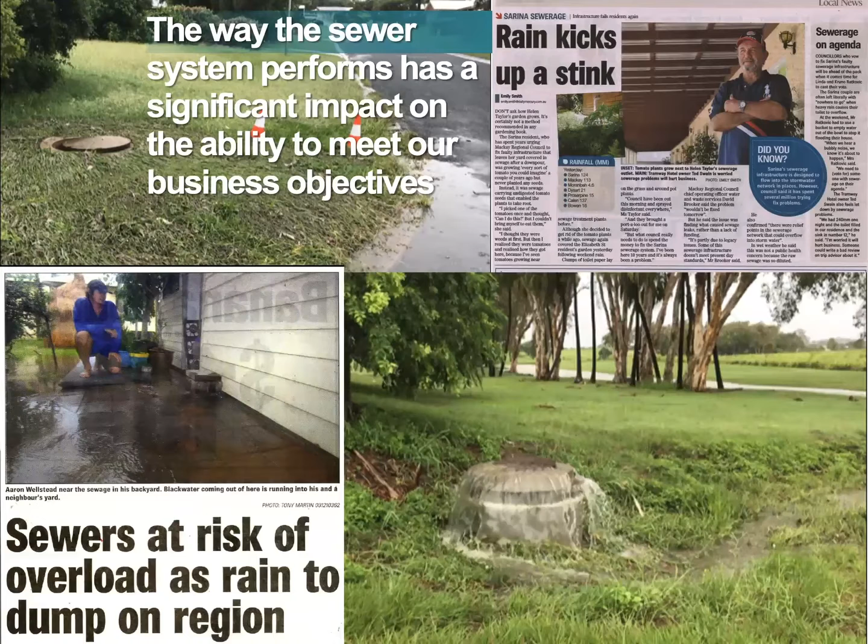But the story reflected to me by the council was that a lot of money goes into maintenance of the sewer network, both in terms of preventing overflows, relining the network, looking for illegal plumbing connections, looking for leaky manholes, to try to track down or prevent wet weather overflow events. Without any data, it can be very difficult to work out what maintenance activities are making a difference, if any, to the impact of sewer overflows. And obviously, these events have quite negative impacts on the members of the public.

So the council came to us with a request to look at building a sewer monitoring system that looked at parts of the sewer network that are not traditionally monitored, or at least not traditionally monitored in a fixed fashion.

So by using the same communications network that we're using for the smart meters, we've worked with the council to install sewer sensors or level sensors in the sewer, and then using that same low power communications network to be able to pull the data out of the field, concentrate it on a receiver, bring it back to the cloud, and then process and deliver that data through to application software. The objective of using a low power network is to decrease the overall cost of a fixed monitoring network.

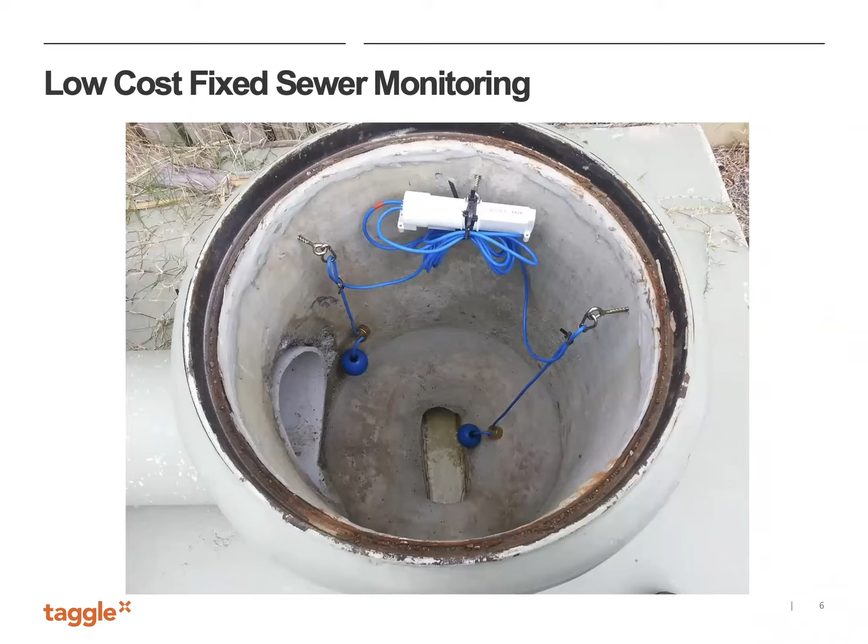So as a first generation device, these work reasonably well, although we did discover that sewer networks are quite turbulent environments. Let me describe how this is supposed to work, and then I'll talk a little bit about the limitations. So those float switches operate by, as the fluid level in the manhole rises, the float switch lifts and triggers a switch, either a mercury switch or a little ball bearing oriented switch, that tells you that the float has now inverted and that there's now water at that level.

And so in the normal operation on the left-hand side here, we would see that a float switch should be off if the pipe isn't full. By strategically positioning the first float switch, as the sewer pipe reaches capacity and starts to fill the well in the manhole, this first switch will actually activate and send a message to the transmitter that then sends a message back to the cloud software.

By installing a second float switch and setting its threshold level at the overflow, this second float will tell us that there is an alarm state. We're now discharging sewage into the environment, potentially impacting the public, which is ideally something we really want to prevent. The first switch gives us some pre-warning that the second event may be occurring. Now, it doesn't have the resolution of other sorts of level sensing, which I'll show you a little bit later, but it does have that advantage of simplicity.

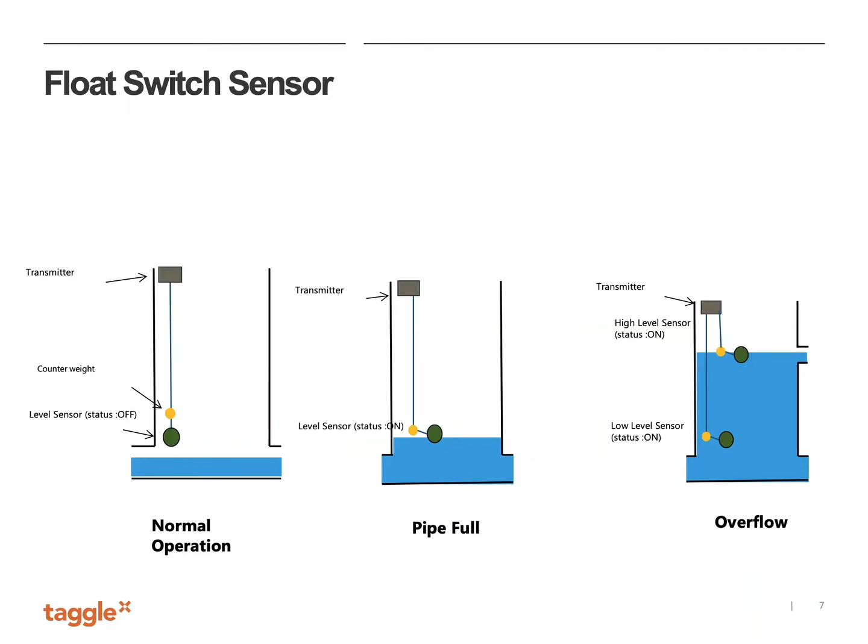Taggle worked on a new generation of transmitter based on that feedback, so that there's some business logic in the transmitter to be able to distinguish between a rise or a fall in the float switch and just the bouncing around of the ball for turbulence. Overall, this is a pretty good mechanism for monitoring sewer levels. But where it becomes a little bit more interesting is when you get to correlate the behavior of the sewer levels with what's going on elsewhere.

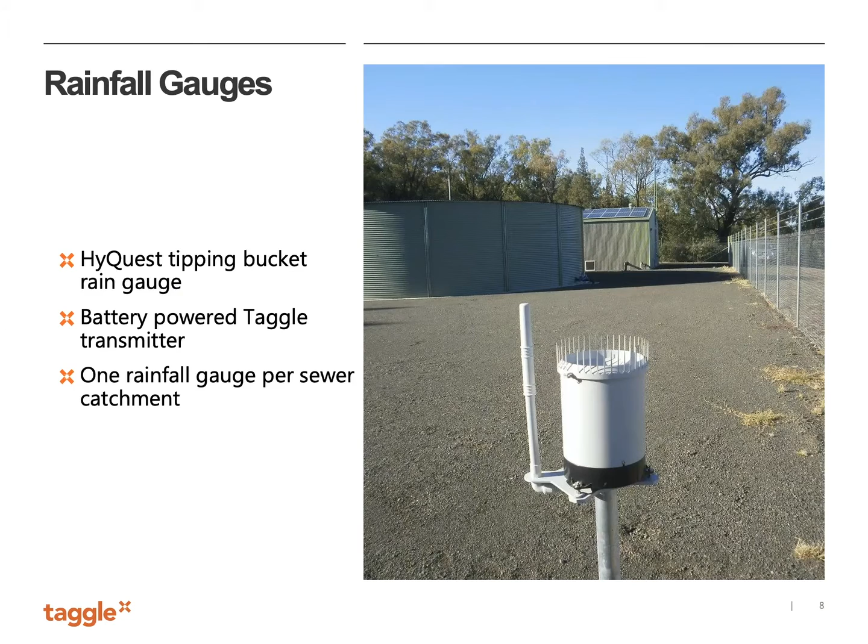So this is an example of a relatively low-cost rainfall gauge. It's a very high-quality gauge. This is in the same family as the one that the Bureau of Meteorology uses. And attached to the left-hand side of that is a Taggle transmitter. That unit stands alone. It doesn't require a communications cabinet, doesn't require any additional power supply. That's really just a pole concreted into the ground with a little bit of effort to make sure that the rainfall gauge is leveled. And if we put one of these in each catchment area aligning with the catchments of the sewer, we can now start to correlate rainfall in a catchment, which is indicated in this chart in blue, with the sewer level occurring in that catchment.

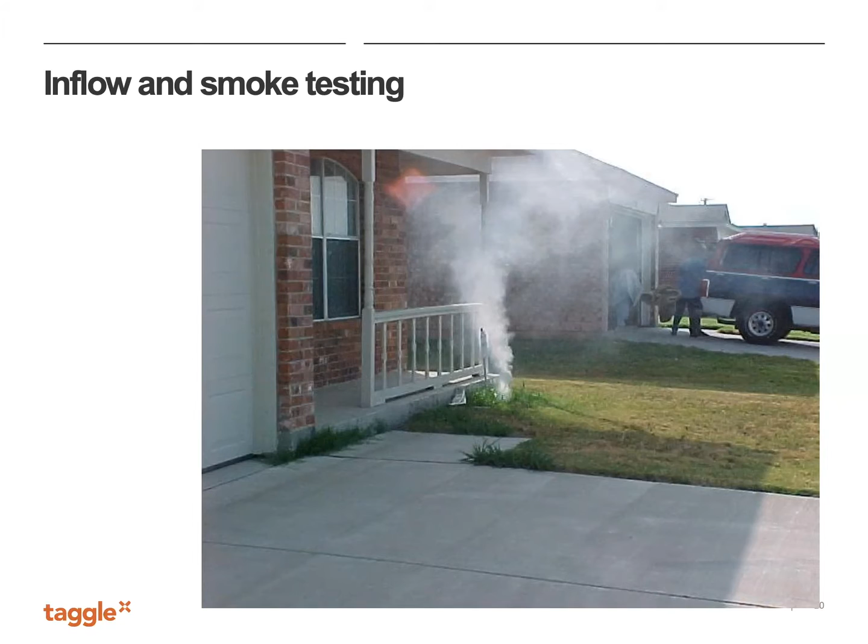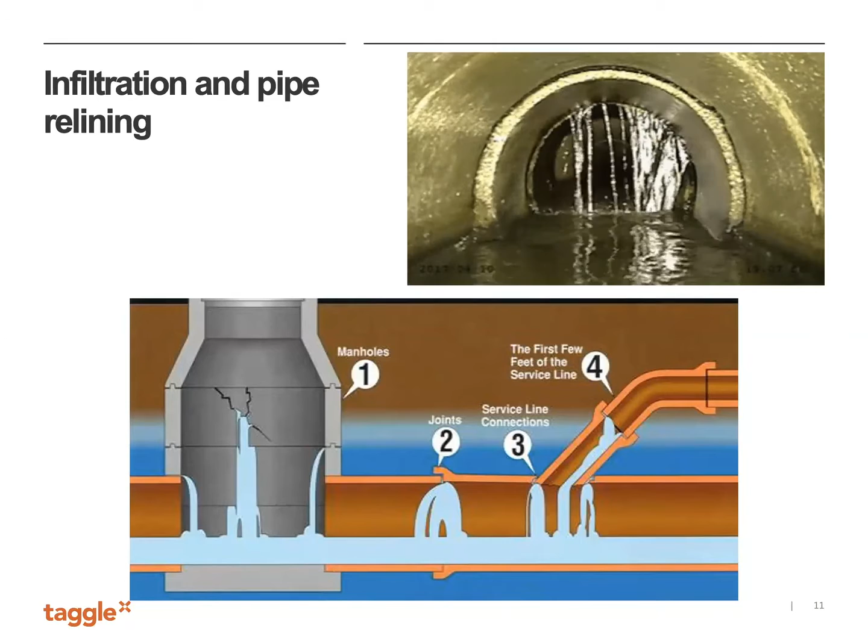But the other cause of sewer overflows is when the water isn't coming directly from rain, but instead it's rising groundwater. So rising groundwater will leak into sewer pipes and fill their capacity in that fashion. But what that would mean on a chart like this is that you wouldn't have this correlation in time quite so quickly. In somewhere like Mackay, if it rains for sustained weeks or months, the groundwater will rise over time, and sewer overflows that occur over an extended period of time, that take a long time to rise and then a long time to fall, are far more likely to be associated with groundwater ingress than rainwater inflow.

The other advantage of seeing sewer levels on a time series chart like this is that you get to pick up situations that you might not have expected. In one particular situation, we experienced the sewer overflowing on a fairly periodic cycle, 8 or 9 hours apart, which was then identified as being the result of a tidal inflow where a valve on a sewer outlet wasn't operating correctly, and the estuary water was getting into the sewage network, and then effectively just filling the sewage treatment plant with salt water. So seeing what's happening in the sewer network in real time can provide some real insight into problems you might not have known actually existed.

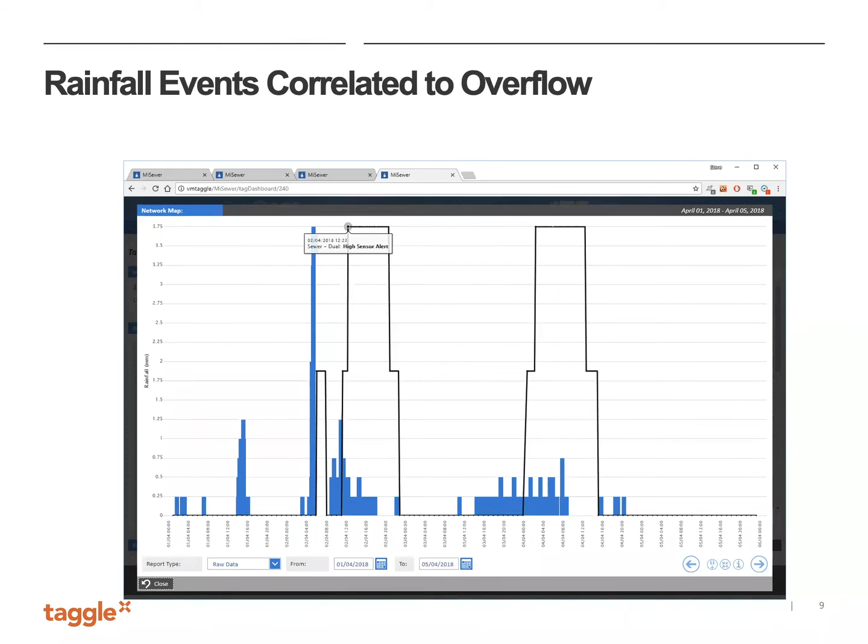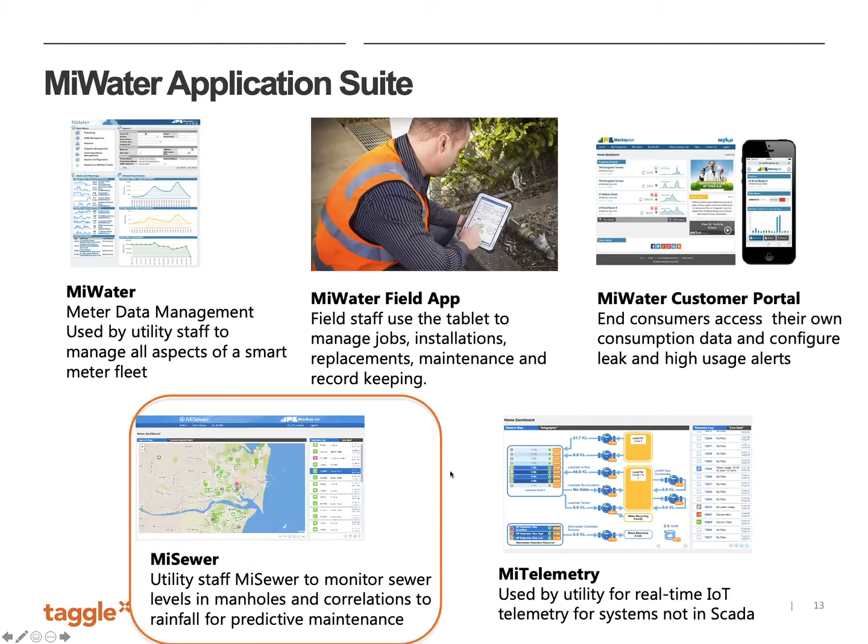So in order to make sense of this data that we're generating out of the sewer sensors, Mackay began a project to develop a software product called MiSewer. MiSewer began as part of the MiWater application suite. We spoke last week about MiWater as a meter data management system and a field app and a customer portal. But on the sewer network side, there was an application specifically associated with sewer monitoring that was developed to take advantage of that data that we just presented. And it looks a little bit like this. So a little bit more with a GIS view of the world.

Each of these manholes has sensors attached to them, and has some visibility into what's going on in terms of rain, what sensors are alarming, and being able to see that on a visualization that's sort of map GIS oriented. When Taggle acquired the MiWater suite at the beginning of last year, we put a lot of effort into developing the capability of MiSewer.

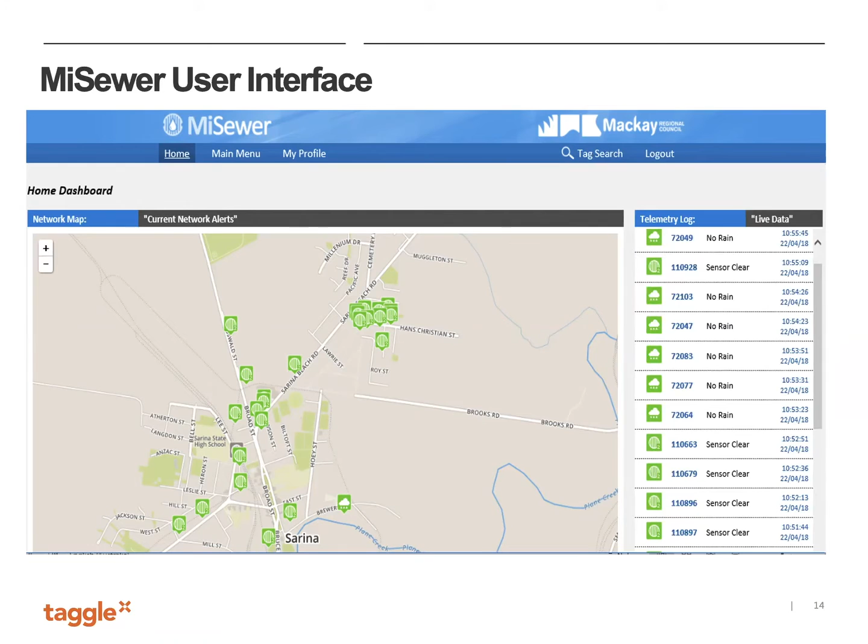So now, while it has all of the capabilities of the original version, we've now got a number of new features designed to allow the utility to manage this information in a more structured and controlled fashion. We've extended the features to allow the utility to set up alarms on these sewer network points when something is going on that doesn't look right. These green manholes are in the normal state. The orange ones are in a pipe full state, and the red ones are in a discharge overflow state.

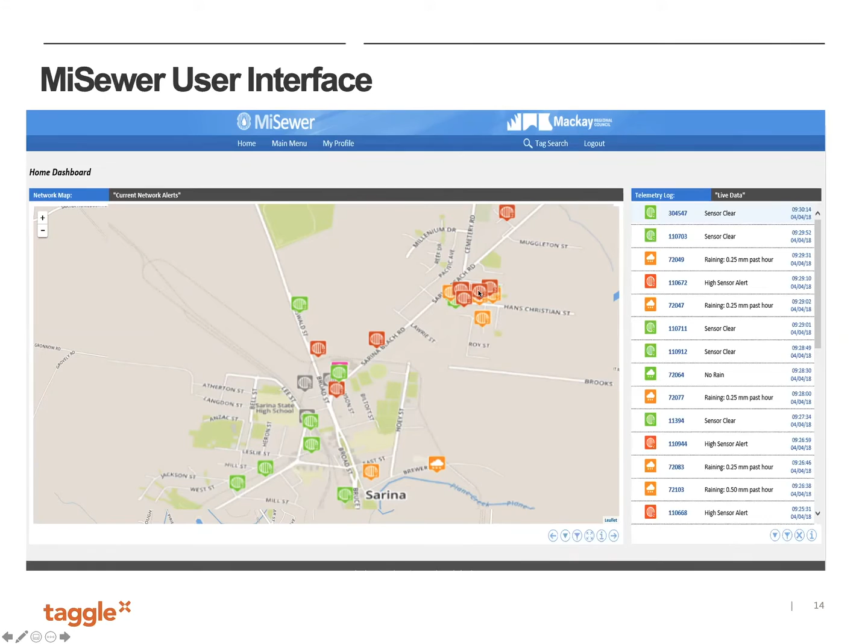In this window here, we can see on the right-hand side, we've got a series of alarms, and those alarms are appearing not only in the software, but sending text messages or emails to nominated people indicating that there's a problem, and it allows some alarm management, some tracking style functionality, similar to what you'd expect if you were doing this in a SCADA system. Now, there's often a question about why wouldn't we be doing this in SCADA? Why do we need another piece of software?

And the argument is that it's a little bit more around the organizational structure, that the people who are in the operations room monitoring the network are generally focused on very, very real-time events. They're looking at the state of reservoirs, the state of pumps, the state of the water treatment plant. They're looking at managing the network right now at this minute, 24 hours a day, 7 days a week.

This sort of sewer monitoring is something that is a little bit more analytical. The data makes more sense the longer you look, the more data you have. So analyzing the problems with the sewer network isn't something that you can do in 60 seconds. It might be something where you want to build a pattern over days or weeks, or potentially months and years, in order to work out what maintenance activities need to occur. So this is less about real-time emergency management and more about longer-term network planning on the whole.

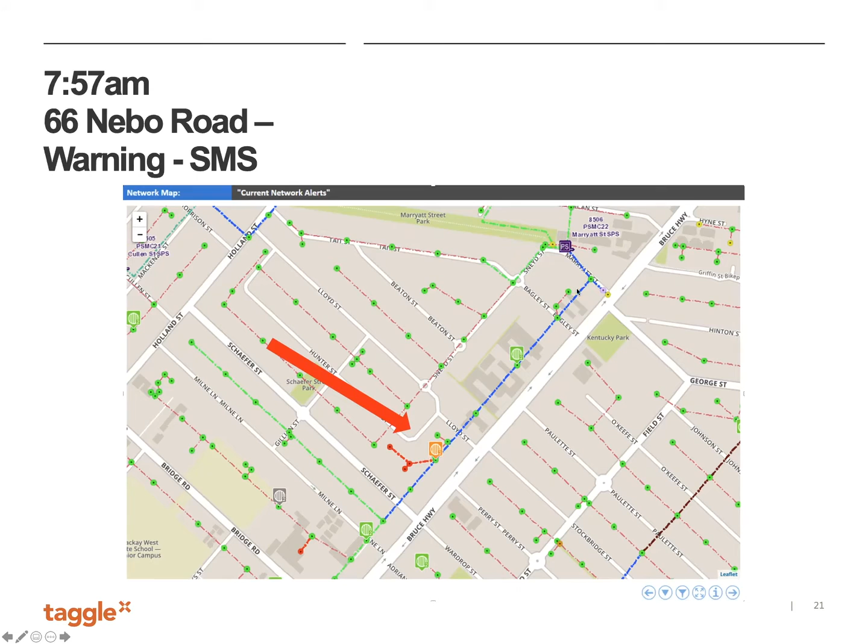So the event seems to start about 7:30 in the morning. About 30 minutes later, this sewer manhole sensor starts sending an alarm saying the pipe is full. So what's happening is that this wet well is filling up, and it's backing up through this pipe here. And this alarm here is starting to show that there's a problem.

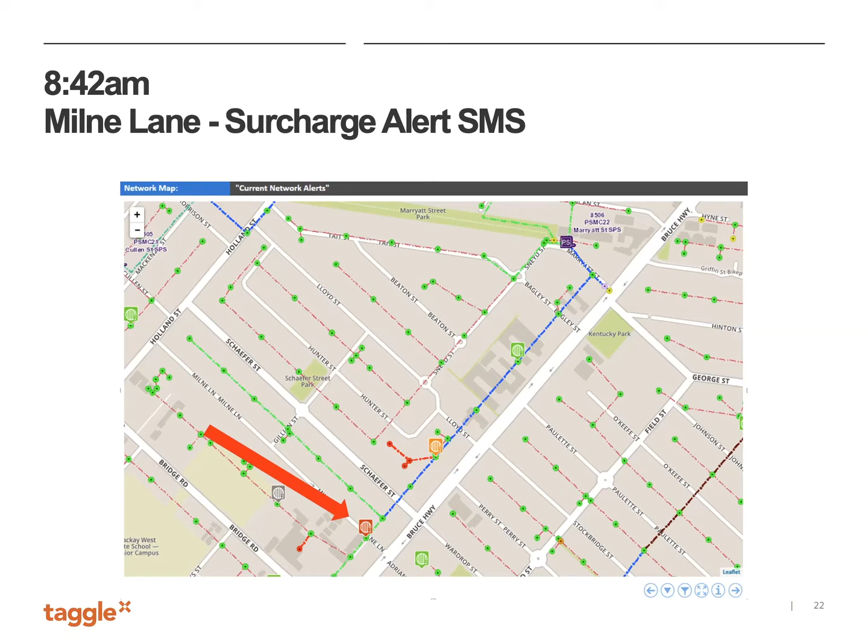40 minutes after that, a manhole further upstream goes into an overflow state. So what that means is we've now got this entire pipe full and it's starting to discharge at this point here. At which point it's now sending text messages to the operations team saying there's something wrong. You might want to go out and have a look at what's going on, potentially send a cleanup crew, but also try and work out what the root cause of all of this is.

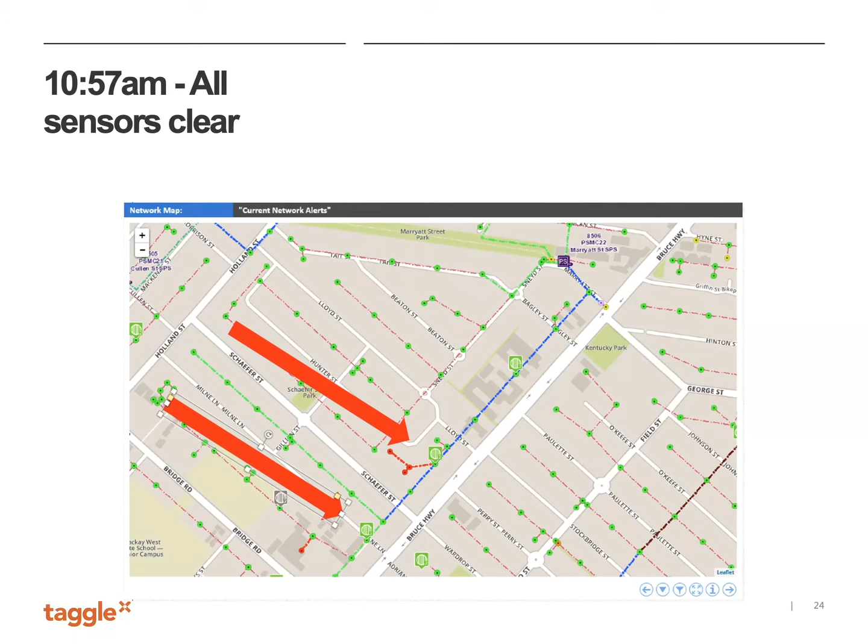The power problem at the pumping station was resolved. That alarm went back to green. That one stayed orange for a little while, and then the entire system went back to all clear. So that sort of operates pretty well as expected. But what it provides is another layer of granularity that your traditional SCADA system doesn't normally provide. So this is what we see as an adjacent technology, something that extends the visibility of operating a sewer network.

So our first experiences with sewer monitoring were with Mackay, but there are a number of other utilities doing sewer monitoring as well. And I wanted to explore a little bit with you the work that SA Water has been doing. SA Water over the last few years have put quite a bit of money into exploring what technologies might be valuable. They had the benefit of a CEO that was very technology and data friendly. And he provided a budget effectively as an R&D exercise to go and explore what data can tell you without necessarily knowing what the business case was at this stage. This project was about actually developing a business case for what technology could be rolled out further.

So SA Water has been investing quite heavily in smart network technology in the Adelaide CBD. They've installed smart meters out at Penneshaw on Kangaroo Island, and smart network meters on the network at Port Lincoln. But what I wanted to focus on really today was the work that they've been doing in the wastewater, which are these sensors up here.

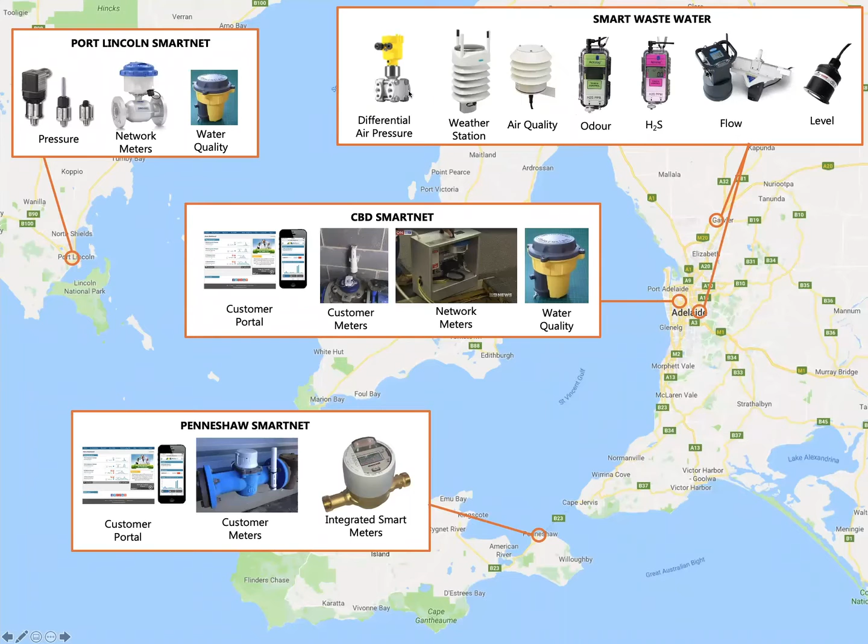There are two areas that the SA Water project focused on, one of which was at Gawler, which is northeast of Adelaide up here, and another one at Stonyfell, which is in the Adelaide Hills. And SA Water put quite a few sensors into the network. They're looking at level sensors, but also sensors that could look at velocity, the speed at which wastewater was flowing, gas concentrations and odor, air quality and weather, and differential pressure sensors. And I'll talk a little bit about each of those in just a sec.

So SA Water took a different approach to level sensing than Mackay. As a bit of a research exercise, SA Water used these much more granular style sensors. This is an ultrasonic level sensor.

It sends a click out. It's quite a disconcerting sound if you've ever heard it, a little bit like the way a bat would do echolocation. It sends a click sound out and listens to the echo of the sewer level at the bottom. And in fact, this sensor is quite clever in that it has echo cancellation built into it so that it knows what it should be listening to and what it shouldn't.

So for example, the echo off the concrete apron around the pipe down there doesn't mean anything. So it will ignore that reflection and concentrate on the sewer wastewater level, which is the water you can see in the pipe down there. And that'll provide millimeter level accuracy.

On the wall of this manhole pit here, we've actually got two boxes, one of which is the Taggle transmitter device. We've also got a battery pack here to extend the life of this, because this transmitter is actually sending information every 5 minutes, which is a little bit more frequently than we would normally do. Because the utility SA Water wanted to see what the benefit of that extra granularity of data was, even though they thought that was more data than they actually needed.

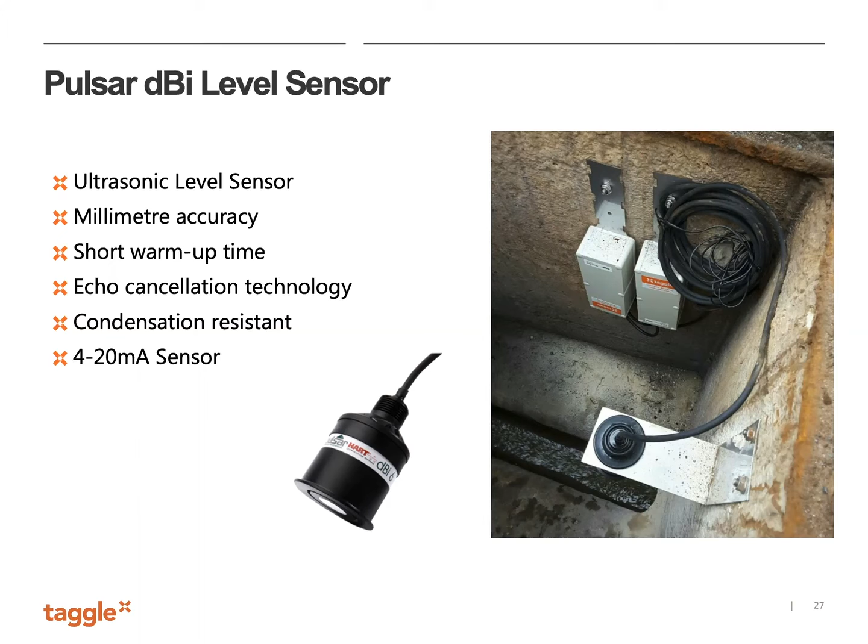The advantage of monitoring a manhole like that, and particularly in Stonyfell, is that when you get a dry weather overflow, the benchmark I'm hearing from multiple utilities is a number around about $25,000 for the cleanup exercise. And too many overflow events, and the EPA in each state starts to get interested, and that can be a pretty expensive and disruptive exercise.

The findings from Stonyfell in Adelaide was that sewers don't block straight away. They gradually degrade, tree roots get into the network, wet wipes get tangled in the tree roots, and the performance of the pipe starts to decrease over time. And then that's where the blockage starts to occur.

And what they were finding is that for all the manholes that we are monitoring in Adelaide, it would provide 2 to 3 days notice that an overflow was impending, was likely to occur, which is plenty of time for a cleaning crew to get out and clean the pipes, get rid of the tree roots and wash out any gravel or whatever the particular issue is, before the wastewater hits the surface.

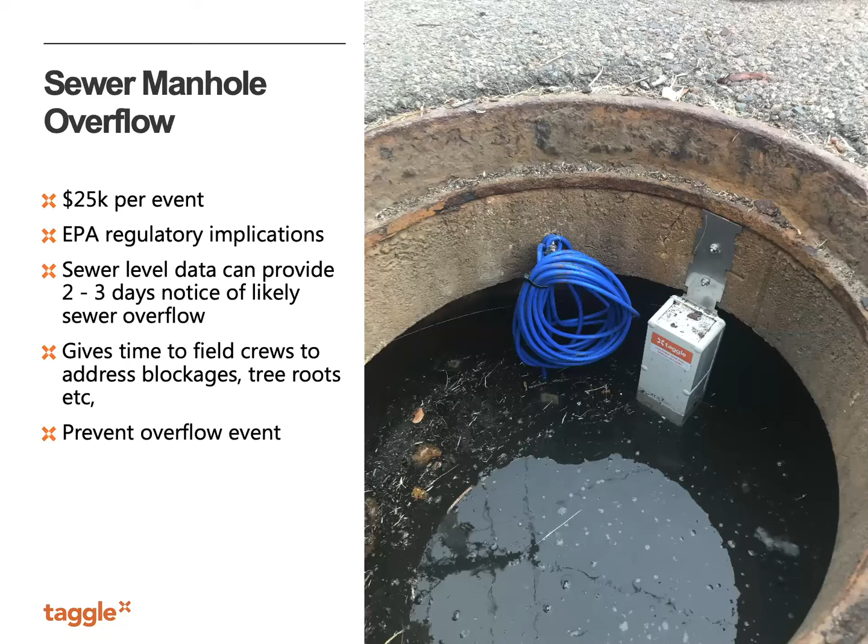So in Adelaide, SA Water decided to put sensors in Stonyfell where they had regular sewer overflows, and in Gawler where they had regular customer complaints about odor coming from the sewer, which is where I'm about to switch to next.

So just before I get to the odor sensors, this is the radar sensor. This comes from a company called Hach, and placed down near the wastewater, it'll actually tell you the velocity of the wastewater as well. So when you're trying to track down whether you've got an aging wastewater problem, which is increasing the odor-causing gases, velocity can be a useful piece of data. It's quite an expensive sensor, so I don't think this is one that will be deployed widely across the network in a fixed network sense. So much more expensive than the blue balls, but can be used to calibrate models.

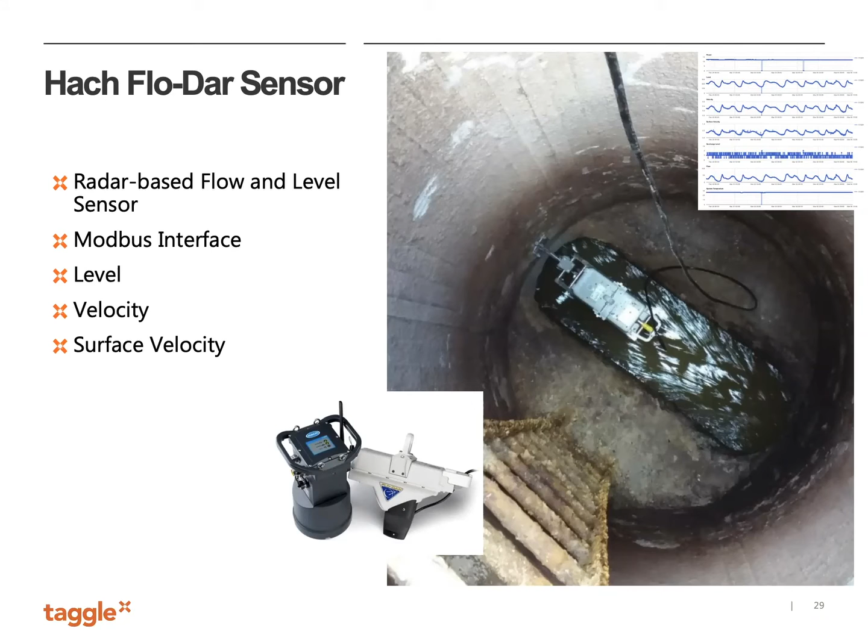One of the innovative areas I thought that SA Water were exploring was to monitor what's going on with gas concentrations. So they know they've got slow-moving wastewater in the Gawler area. And they know that because there's high concentrations of gas in the sewer. There are corrosion issues with the pipes, and there are customer complaints about the smell of the sewer.

So rather than just relying on that sort of observational anecdotal data, SA Water installed about 80 of these Acrulog H2S gas sensors. They come in two models. There's a parts per billion sensor, so a very sensitive sensor that will measure levels of concentration that you can smell in the air. So the inlet to this sensor is placed at about standard nose height, and is constantly sampling the air and reporting what the gas concentration in the air is.

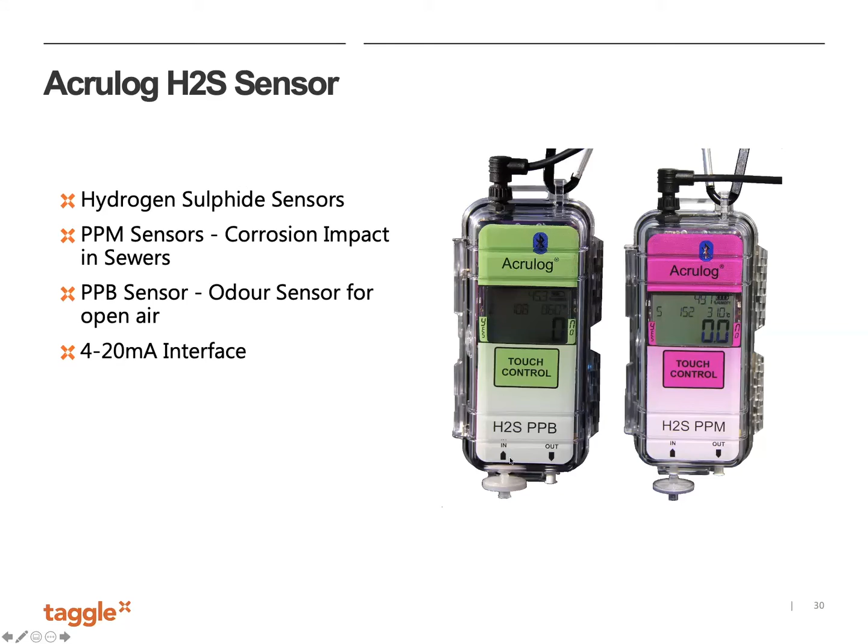The other half of the sensors were actually placed sampling the gas in the sewer using a parts per million concentration. And by comparing that data with data from the velocity, data from the sewer levels, and from weather sensors, they're starting to build a bit of a model about what's going on that's causing the odor and where the root cause of that might be.

They also supplemented that with installing two different models of a differential pressure sensor. So one is from Acrulog, and this one's from Vega. And these sensors monitor the pressure difference between what's in the sewer pipe and what's in the air. So it'll tell you whether the vent stacks are operating the way you would expect, and whether the network is outgassing in inappropriate places.

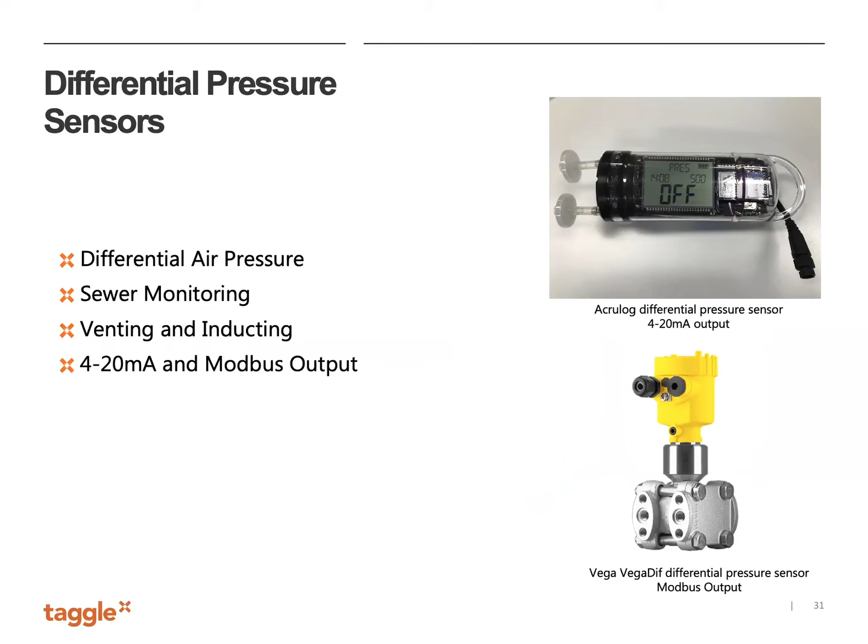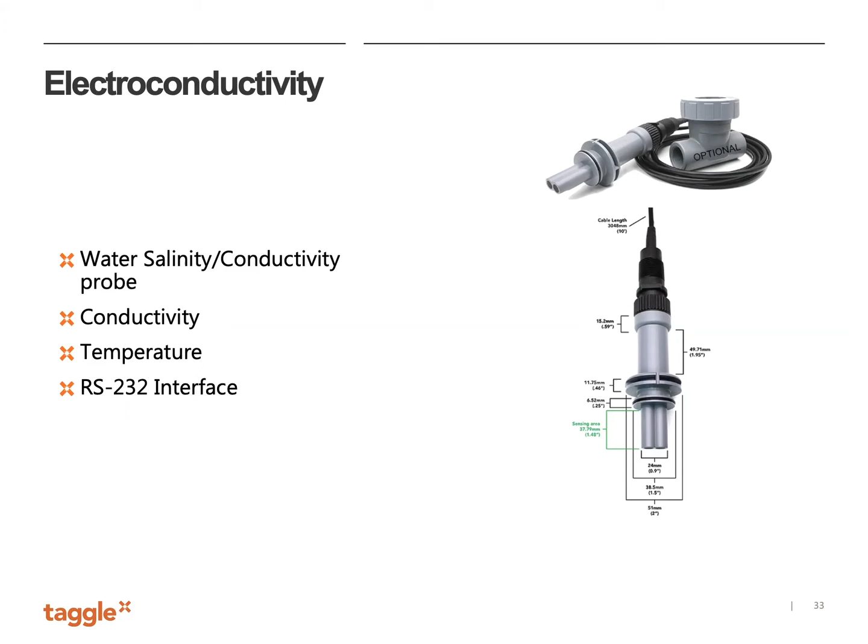And so we have one other customer who's trying to track down seawater ingress into the wastewater. And so one of the sensors that they're looking to use more of is this electroconductivity sensor. There's a couple of different brands of these. We're still exploring what the best supplier is, but basically they work by passing a very small current through two electrodes in the sensor head, determining the conductivity of the fluid, so basically the salinity of the fluid, and that can give an indication of whether or not we've got seawater getting into the sewer network.

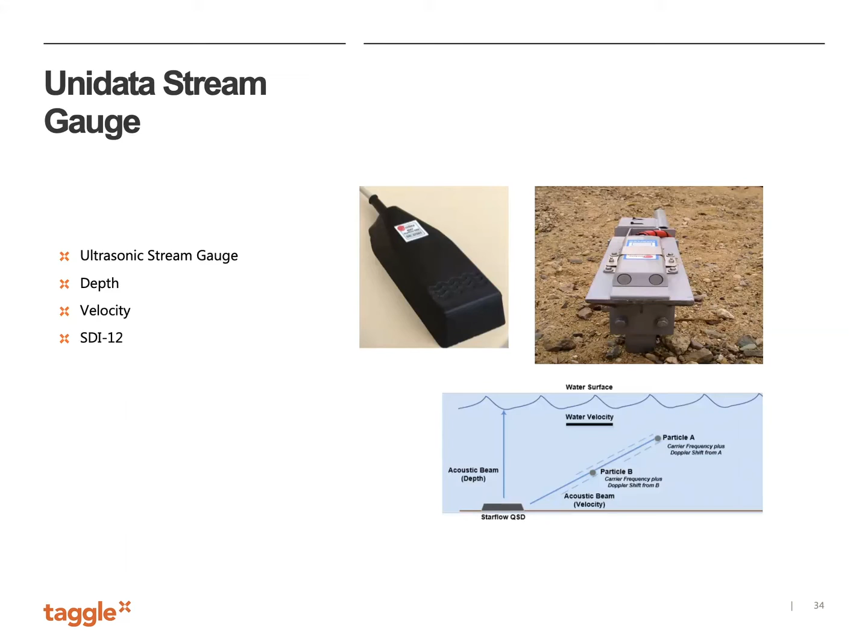And we spoke last week about the stream gauge, which would probably be useful in an open channel, but hasn't, as far as I know, been used in sewer monitoring in Australia just yet.

I might just pause there for a moment. I've only got one set of slides left to go. I think everybody can see the chat messages there, not so much questions, but feedback from Sonia and from Chris. So I think I'll let everybody have a look at their own chat window to see those.

So one of the practical implications of monitoring sewer networks is that being underground and usually under giant steel lids, they're not necessarily radio-friendly environments. What we're finding, though, is that Taggle's high-power radios work surprisingly well out of the box when installed immediately under the sewer manhole.

About 80% of the time, and that number varies a little bit depending on where we are, it will work with a standard device installed under the manhole, and the radio message will actually go through the concrete and the earth, not through the metal, and make its way back to a receiver station. However, we are seeing that there are difficult radio environments in some situations where that just won't work. And so we're extending the Taggle transmitter module with an external antenna.

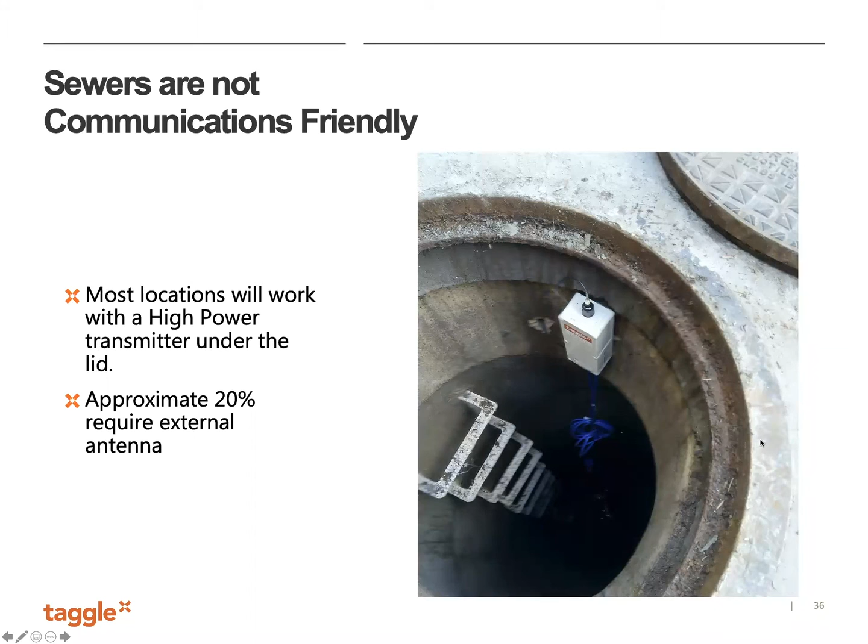And I just wanted to show you photos of a few different variations of how that can happen. Here's one. The installation isn't complete, so it's still a bit ugly looking. So it's a sewer manhole with an external antenna connected to the Taggle module. And what they've done is they've drilled a hole from the concrete path into the sewer manhole, chased that in a channel to the wall, and they've placed this road marker antenna up against the wall.

It's called a road marker antenna because it is actually a road marker that has been modified to insert a radio transmitter antenna inside the road marker. And it's actually rated to be put on the road. So you can drive a truck over the top of it and it will still operate perfectly well. And it's quite a low profile, very, very low and very smooth. So it's minimized the opportunity for a trip hazard.

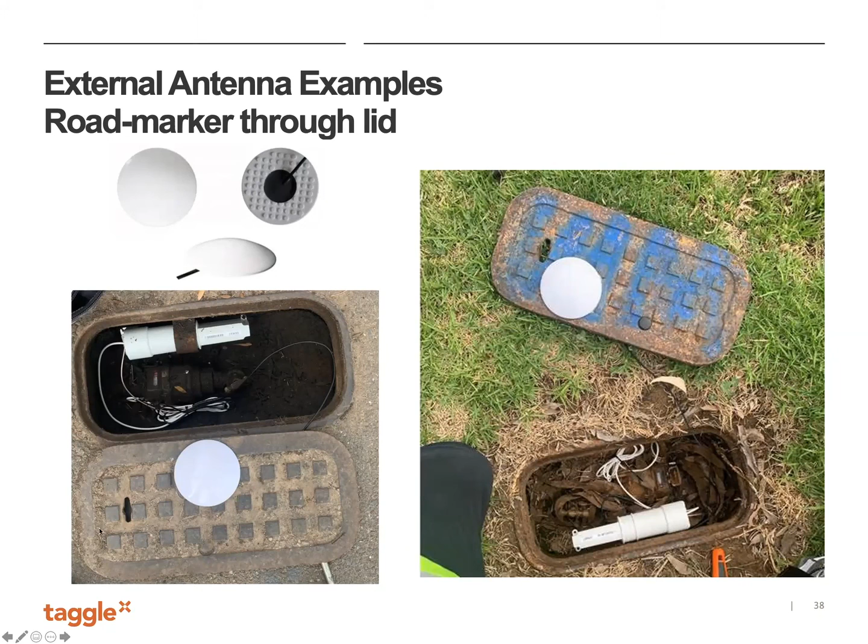And there's two photos here where we've installed those actually in a park, in this case monitoring water meters. But you can see that what we've done in that case is drilled a hole in the pit lid and threaded the antenna through that.

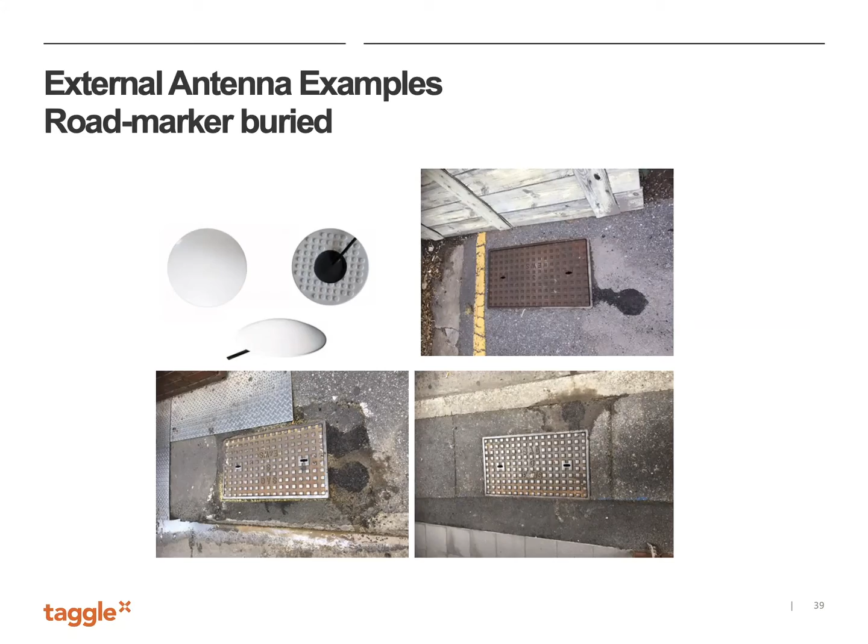So there are plenty of real-world practical solutions to installing low-cost transmitters in the sewer network. And so if you've got an opportunity and you're worried a little bit about that communication, I just wanted to give you the comfort that there are opportunities there.

And I'm just going to finish up on a little bit of new product development from Taggle. All of these devices that I've been showing so far have been predominantly Taggle's LSTT. This is our most advanced telemetry module at the moment. This has the logic in there to be able to distinguish between a float switch turning on as being actual sewer levels or just turbulence in the air.

But this box here is still subject to corrosion attack in the sewer network. The gases, the H2S gas, turns to sulfuric acid. This box has some nickel plated nuts on the back, so it has not been perfect in sewer installations, particularly in those highly corrosive environments. We also showed you one earlier where we had an external battery pack, and that's becoming a more and more common implementation.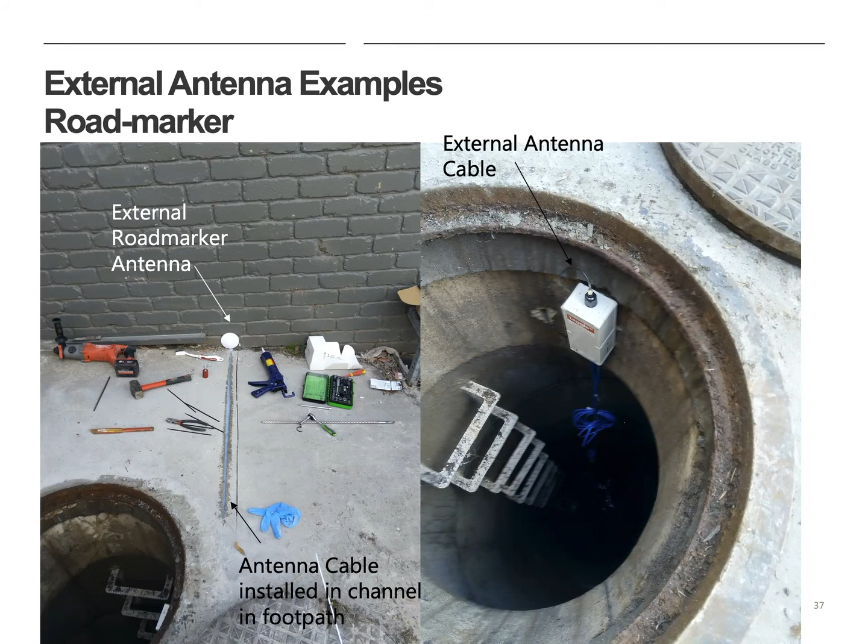So in Taggle, we're constantly working on the innovation and research and development of our technology. So we've taken all of those use cases and all of that feedback on board, and we're developing a new product just about to release called the Cockatoo. All of our new products are named after parrots, I think because they squawk. And the Cockatoo is the biggest of our parrots.

And it has all of the functionality of the Taggle LSTT, but with a slightly new enclosure. It's a cylindrical device, so we've got better waterproofing, so it'll handle permanent immersion in water, an IP68 rated system. Stainless steel connectors everywhere, rather than anything that was nickel plated. So this will survive the corrosion that occurs inside of sewers.

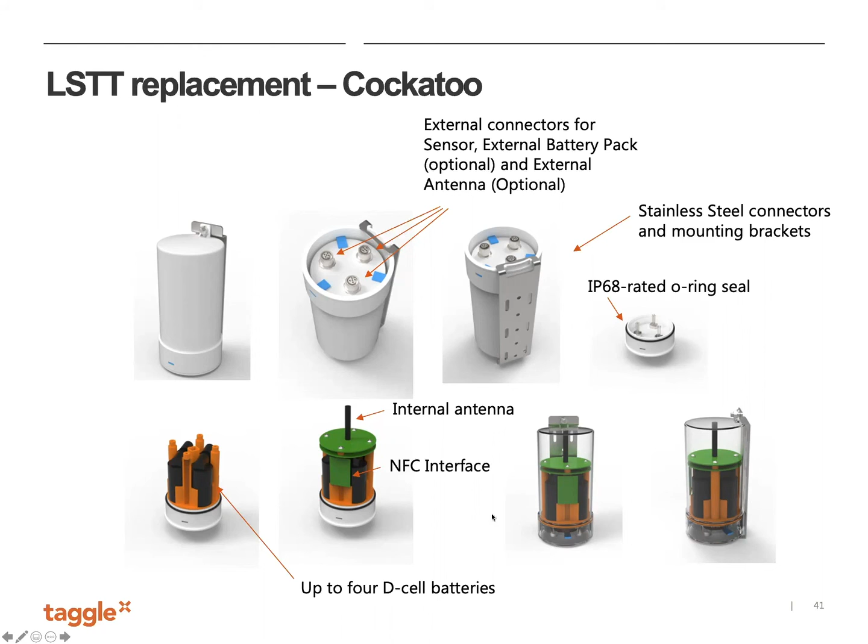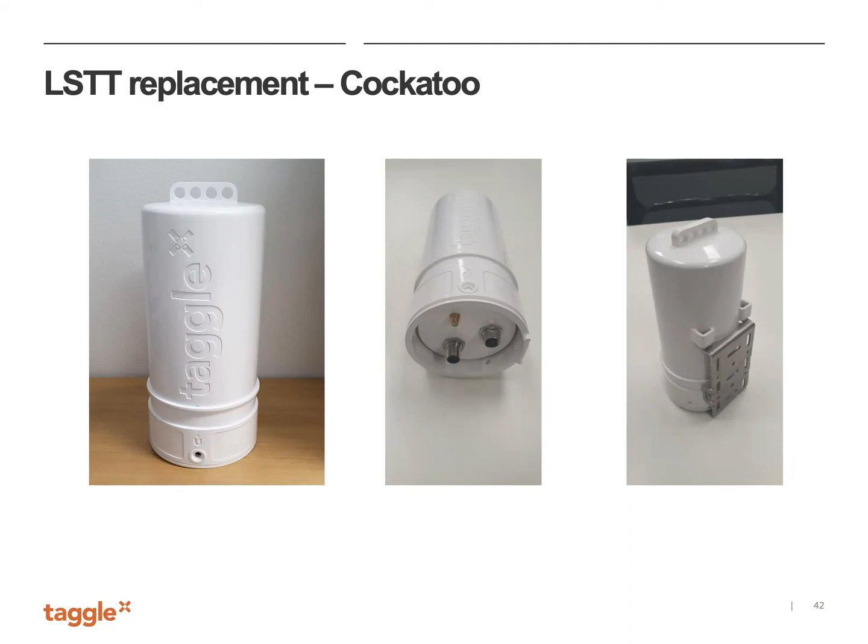And so those were concept photos. These are actual photos. These are the first production prototypes. We're likely to have these available shortly after the new financial year, so in the July, August, September timeframe. Supply has been slightly disrupted by the COVID-19 stuff, but not substantially. And so we expect the LSTT will be superseded by the Cockatoo in the near future, just providing a few extra benefits.

So I think, again, I've spoken for a very long time without taking a breath. So I just want to open the floor to questions. If you asked a question and I missed it in the chat, would you mind reposting it?